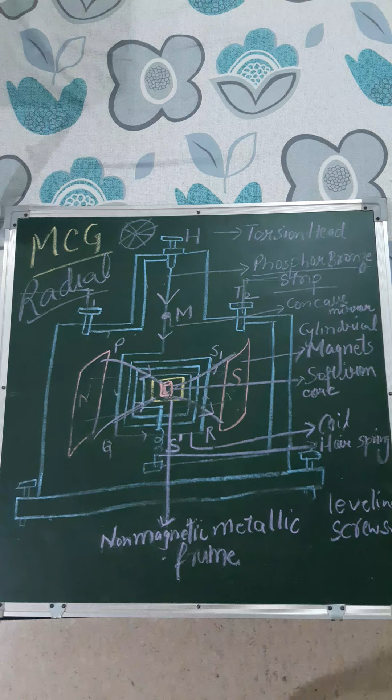Hello everybody. We were doing moving coil galvanometer, so let us do it in little more detail.

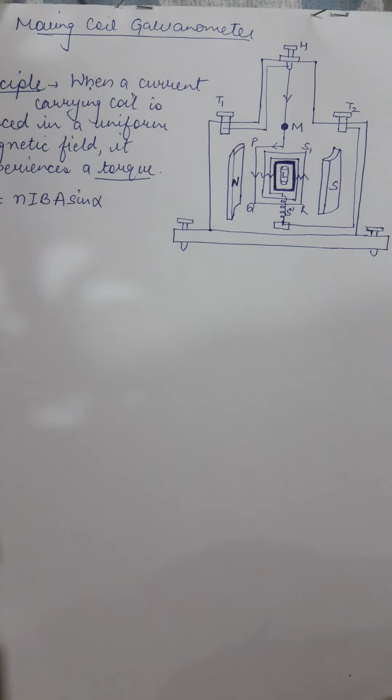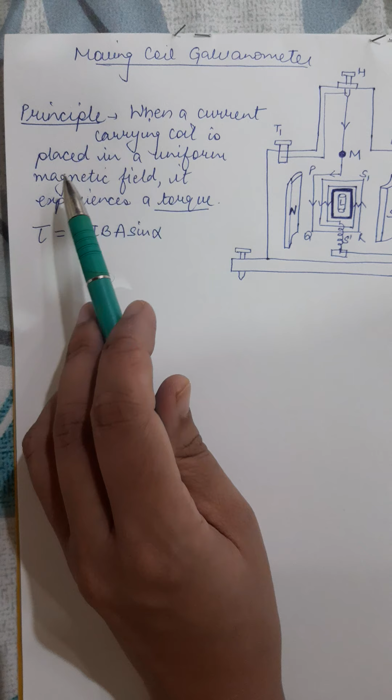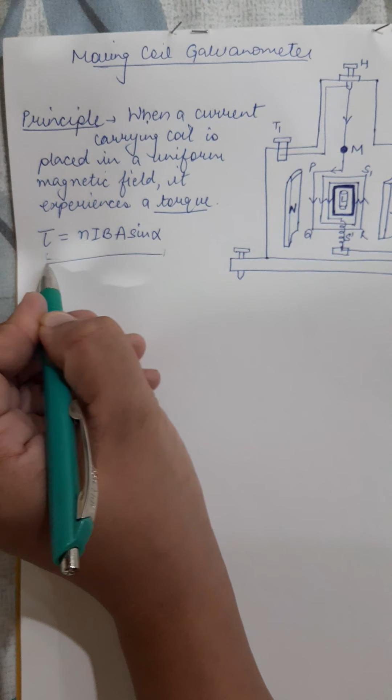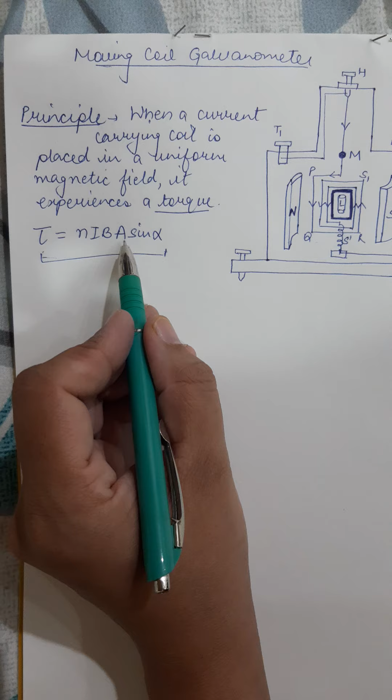Moving coil galvanometer has a setup like this, and the basic principle of its working is that whenever a current carrying coil is placed in a uniform magnetic field, it experiences a torque, and the relation for that was torque is equals to NIBA sine alpha, where N is the number of turns in the coil, I is current passing through the coil, B is the magnetic field, A is area of that particular coil, and alpha is the angle of the area and the direction of the magnetic field, right?

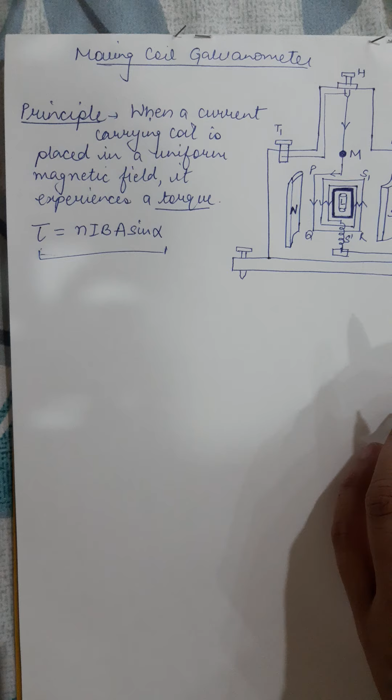So the basic construction points are that it consists of a coil PQRS, which is having a large number of turns of insulated copper, and the coil is wound over the non-magnetic metallic frame, which is generally brass, which may be rectangular or circular in shape. The coil is suspended from a movable torsion head H by means of suspension fiber of phosphor bronze. Phosphor bronze is the type of the material.

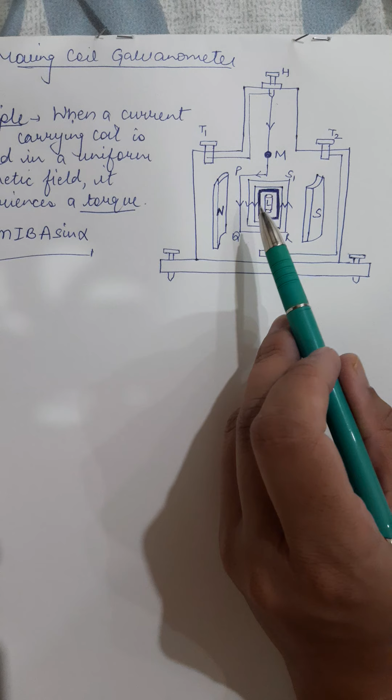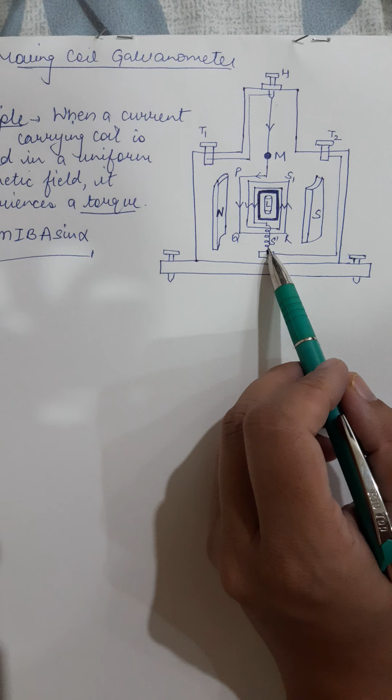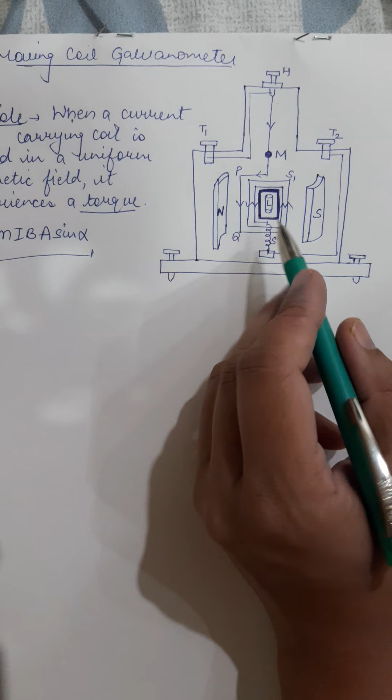And it has been kept inside the strong magnetic field produced by the two cylindrical magnetic poles north and south. The lower end of the coil is connected to one end of a hairspring S' of quartz or phosphor bronze, the same material. The other end of this highly elastic spring is connected to the terminal T2, and L inside the metallic frame. L is a soft iron core which may be spherical if the coil is circular, and it can also be cylindrical if the coil is rectangular.

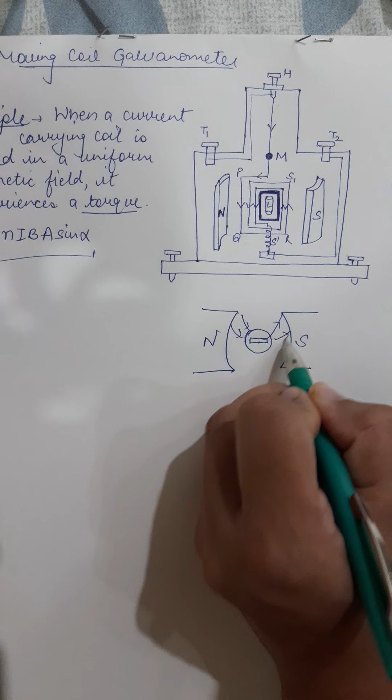It is so held within the coil that the coil can rotate freely without touching the iron core and the pole pieces. This makes the magnetic field linked with the coil to be radial field. So how the radial field goes, suppose these are the magnetic poles, north and south pole, right? And say this is the coil, right? Then what this soft iron core will do, it will attract the magnetic field lines towards itself. As a result, the magnetic field will become radial.

Right? So now when the coil will be moving inside it, suppose it is at this position, then also magnetic field lines are along this, and if it is rotating like this, even then magnetic field lines are along it because it is radially outwards now. So this helps in maintaining the radial field, that is the plane of the coil in all positions remains parallel to the direction of the magnetic field.

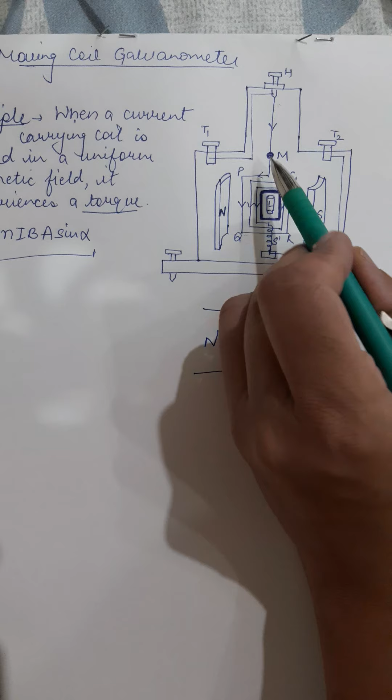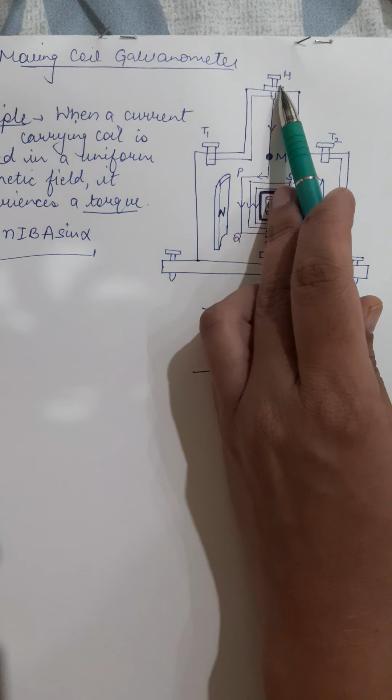M is a concave mirror attached to the phosphor bronze strip, as this helps to note down the deflection of the coil using lamp and scale arrangement. The whole arrangement has been kept in the non-metallic case to avoid disturbance due to air, etc. The case is also provided with leveling screws at the base. The torsion head is connected to terminal T1. The galvanometer can be connected to the circuit through terminal T1 and T2. This is how we can connect it into the outer circuit, right?

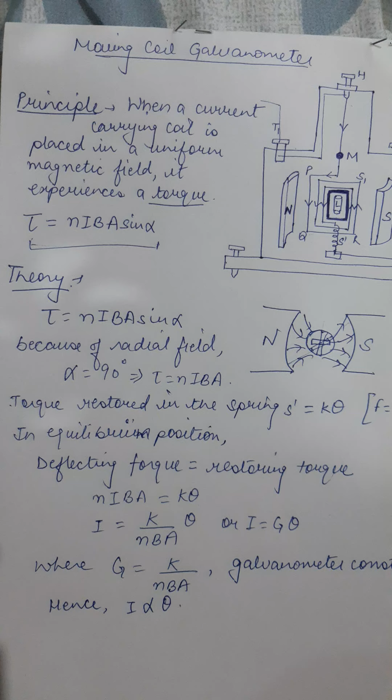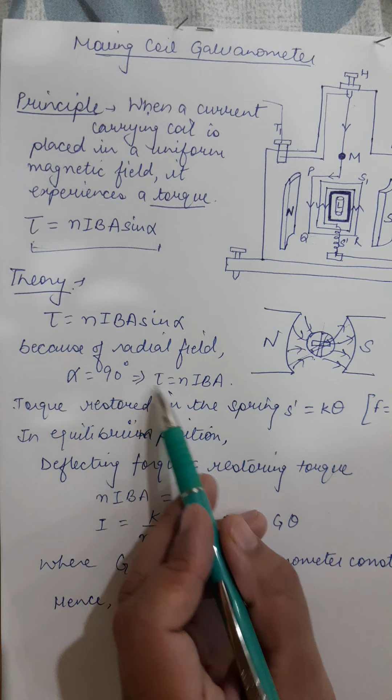Now coming to the theory of this moving coil galvanometer. Now we know that torque is equals to NIBA sine alpha. Now because of this radial field, alpha will be equals to 90 degree. This implies that the maximum torque will be acting on the coil at each and every position inside the moving coil galvanometer. So the maximum torque will be given by NIBA. So the torque restored in the spring.

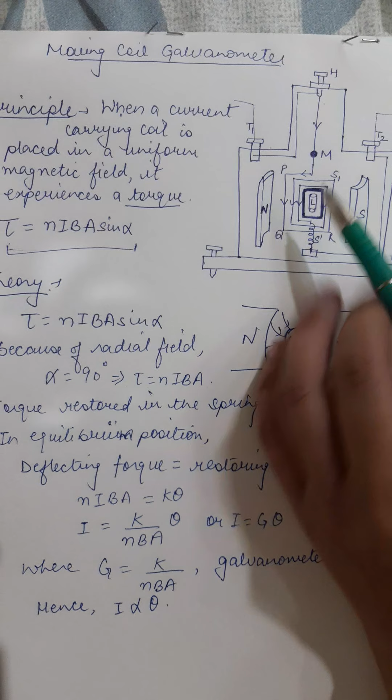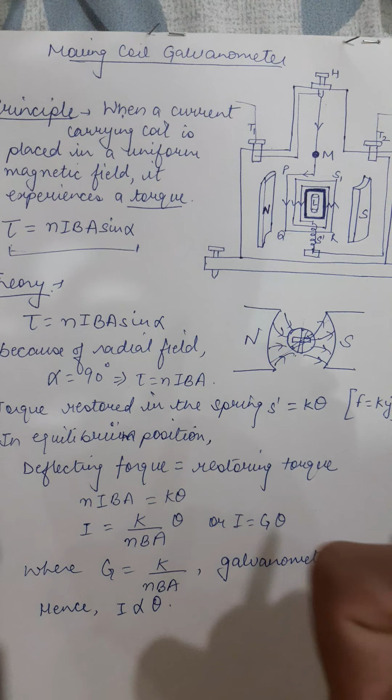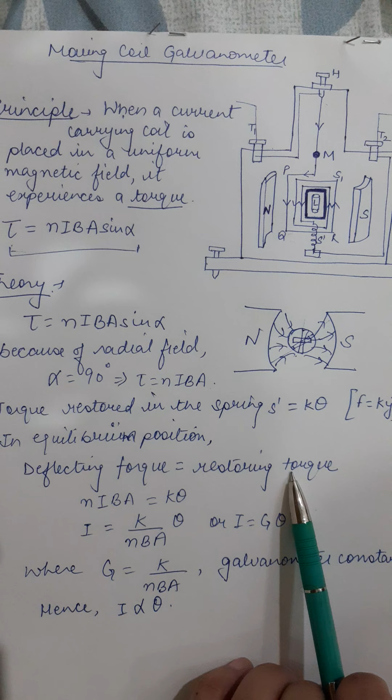Now we know that whenever the coil is going to rotate inside the magnetic field, this spring is going to get deformed, right? It will be experiencing some deflecting torque, and that deflecting torque will result in some restoring torque inside the spring. So in the position of equilibrium, that deflecting torque should be equal to restoring torque. Now what will be the restoring torque? As we know, whenever there was some deflecting force, there always comes out to be an equal and opposite restoring force, which was proportional to the displacement. So it was given by F is equals to Ky. Similarly, in case of torque, the torque restored in the spring will be equals to k theta.

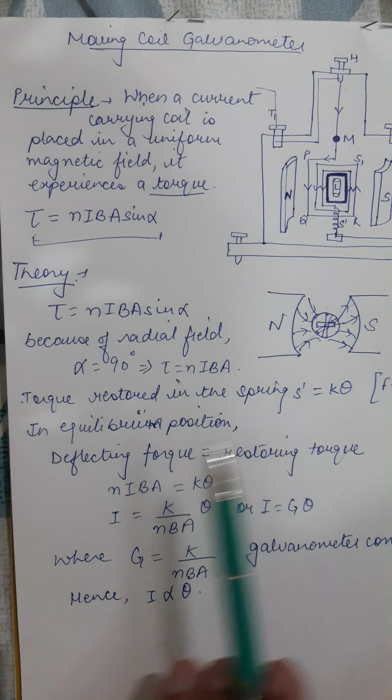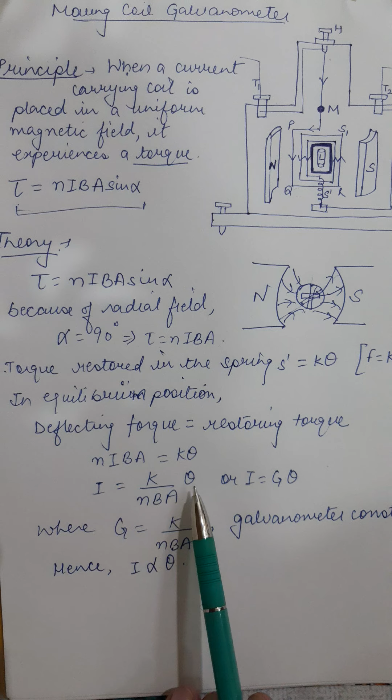Now, in the position of equilibrium, deflecting torque and restoring torque are equal to each other. So, NIBA will be equal to k theta. And from this, I'll get the value of I in terms of theta, and it can be written as I is equals to G theta, where G I have taken as a constant, which is k upon NBA. Here, k is the restoring torque per unit twist of the phosphor bronze strip. N are the number of turns, B is the magnetic field, A is the area of the coil.

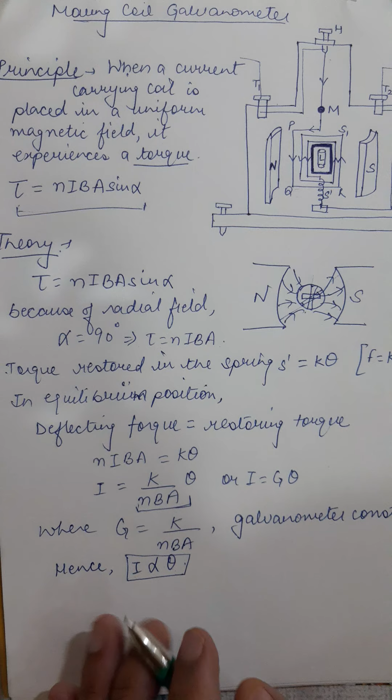Right, so clearly we get that I is directly proportional to theta. So whatever amount of current is there, the scale will show a linear scale for the deflections. If we increase the current into the coil, then there will be a larger deflection. So this is the way the moving coil galvanometer is going to work.